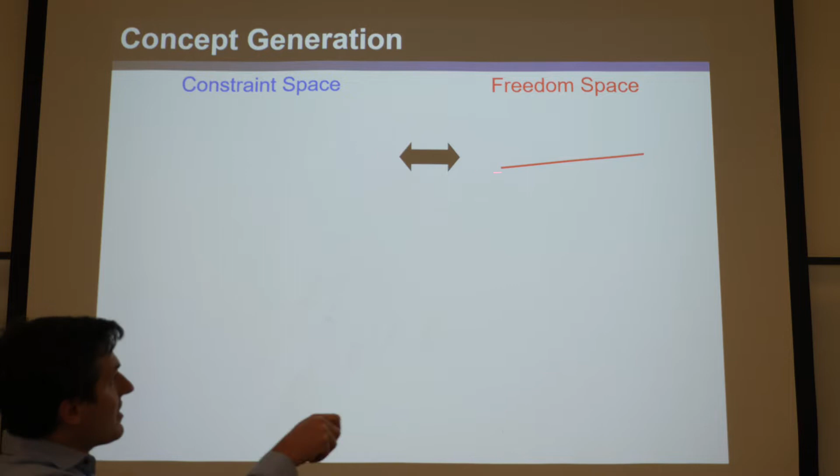Okay, so we'll pick up right where we left off. So let's say we wanted to find the constraint space of this freedom space. This is very common: say you wanted to have a flexure that just rotates, a single rotation axis. That's one of the most common flexures that people want, just give me a flexure that rotates. It's like a revolute joint in rigid mechanism land, right?

Well, say you didn't know the FACT chart and you just wanted to find its constraint space so you could know everything in there, or so you could visualize all the designs. Can you think of a shape that would represent every possible blue line that could intersect that red line? There's obviously a lot, right? Because there's just 1 degree of freedom. So 6 minus 1 is 5. There's 5 non-redundant independent wrenches, pure force wrenches in there, and they're going to make a huge subset of infinity. But can you think of some geometric shapes?

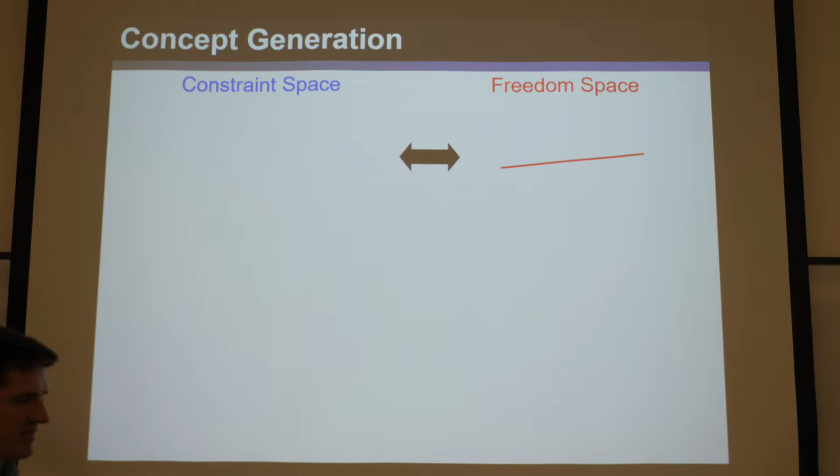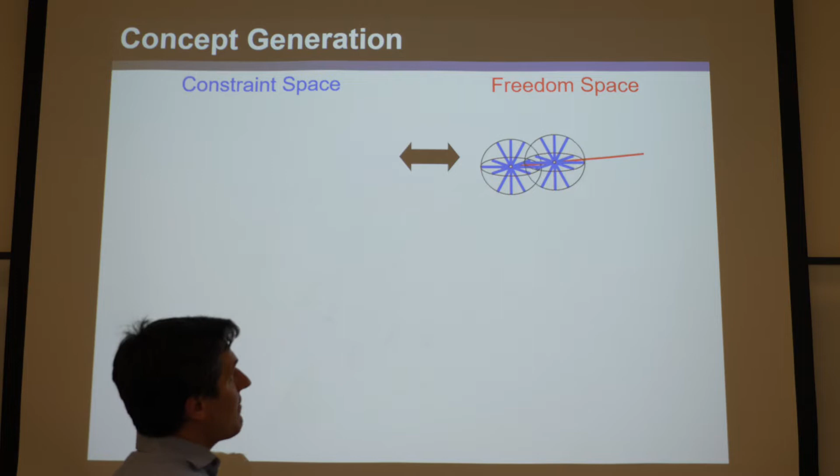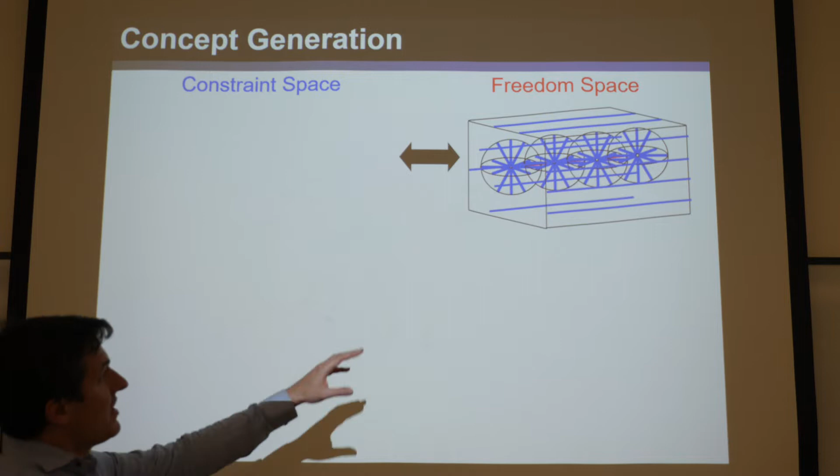Well, in my master's thesis, I thought of it as this sphere: every single blue line in the sphere that intersects that point would be in there, and every sphere marches all the way along there. So you can imagine every single sphere at every single point along the red line would work, and that would capture most of the lines. But then there's all the blue lines in the box that are parallel to the red line. So if you look at my master's thesis, you'll see I draw this constraint space like that.

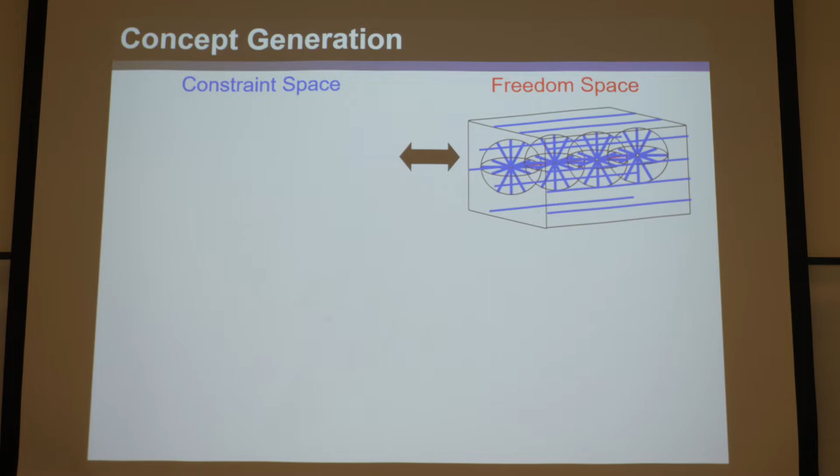But it wasn't until my PhD thesis I realized there's a much more elegant way you can represent all those lines. Those are all the blue lines, conceptually; that's the correct way to visualize them. But a more elegant way to package it is just a bunch of intersecting fully blue highlighted planes. If you take every plane that intersects that red line and fill it in with all blue lines, then that will contain all the lines from the last example. So this is how I started representing it and how it's in the final FACT chart. It's a cool realization that every single design lies within there.

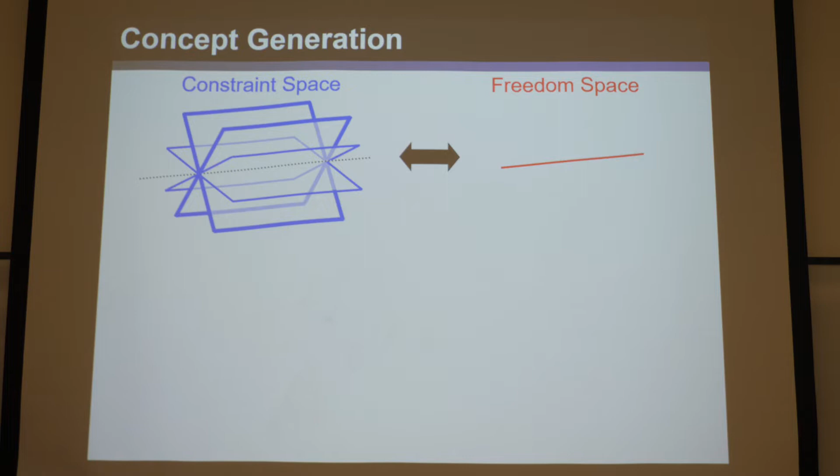So there's a number of papers out there where people publish, hey, I found a new rotational joint. This is a very famous one. This is a cross pivot flexure where the blades lie on these intersecting planes, which is why it only achieves a rotation. Now, by the way, cross pivot flexures are amazing. They maintain their stiffness over a huge range. They have very high load capacity and do an amazing job. So it's a brilliant flexure, and this deserves its own paper, to be honest.

But there's a lot of papers where people keep designing things that look totally different. This is, by the way, how you could assemble it. But for instance, this looks totally different. This thing also achieves a rotation. It's grounded in these two back ends. The reason it only gets that rotation is because its blades lie on these intersecting planes.

Oh, gosh, I really need to take a break here.

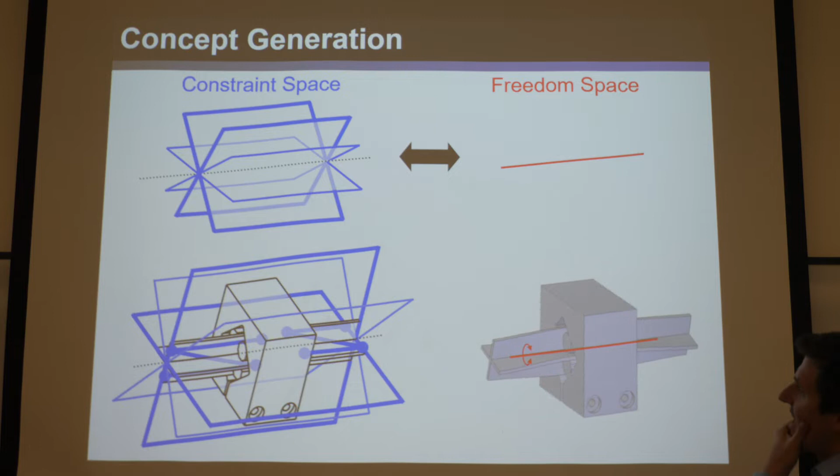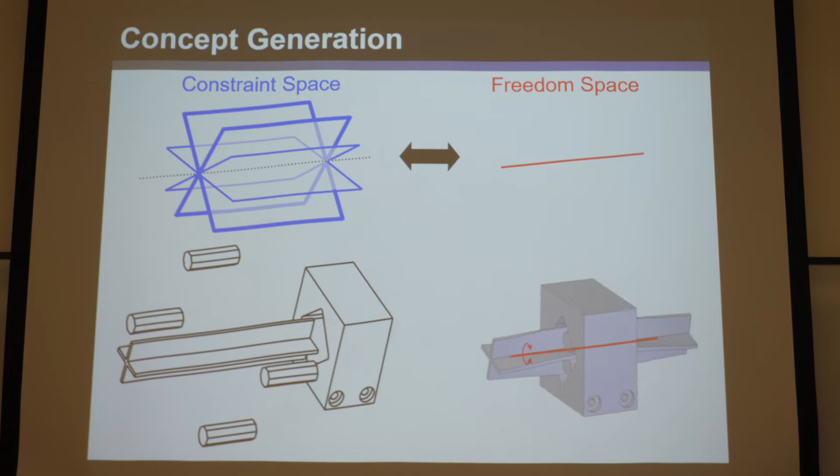But anyway, that's why it achieves that rotation. And it looks completely different. Here's how you could make it: you put some bolts in there to clamp it. That would be one way to do it. And then here's another totally different looking example where it's got 4 blades connecting these two bodies that also lie on these intersecting planes. They get a rotation as well.

It's just the first instantaneous motion that's permitted. It's the direction of compliance. So before this ever deforms, it actually is a pure rotation. Then as it rotates through other infinitesimal increments, it actually screws in, whereas the other ones don't. Although with this one, the axis of rotation actually drifts as it moves with a certain parasitic error.

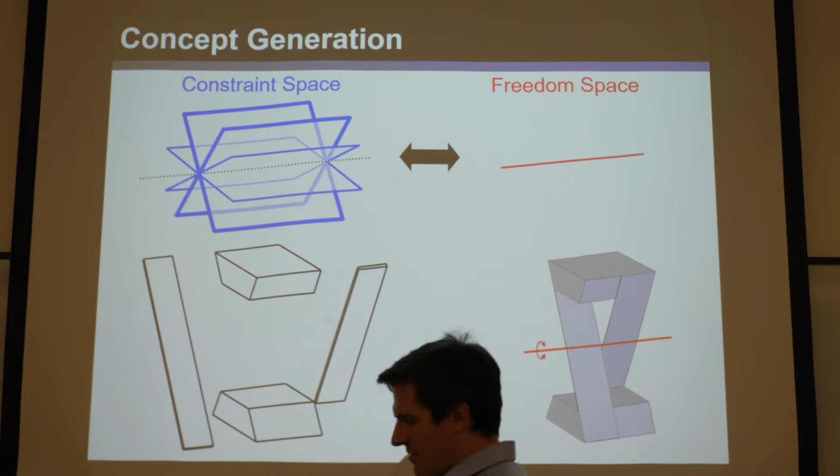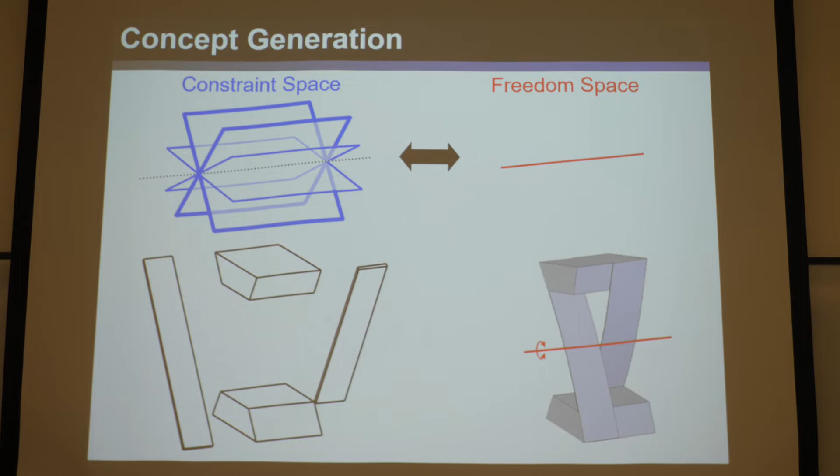But anyway, FACT doesn't consider that. FACT doesn't care about that. That's a higher level analysis. It finds, before it even deforms, what the instantaneous initial direction of highest compliance is, or axis of rotation. Okay, and so they all have the same initial instantaneous rotation, and the reason is because all their flexures lie on these planes.

And so what I was saying is a lot of designers will just keep publishing papers, and it seems like they're very creative and they have these really neat new designs that look very different than these three, and they keep coming with these rotational flexure joints. But once you know the secret that all designs lie in these intersecting planes, all these new designs stop looking very novel and creative, because they just all lie on those planes.

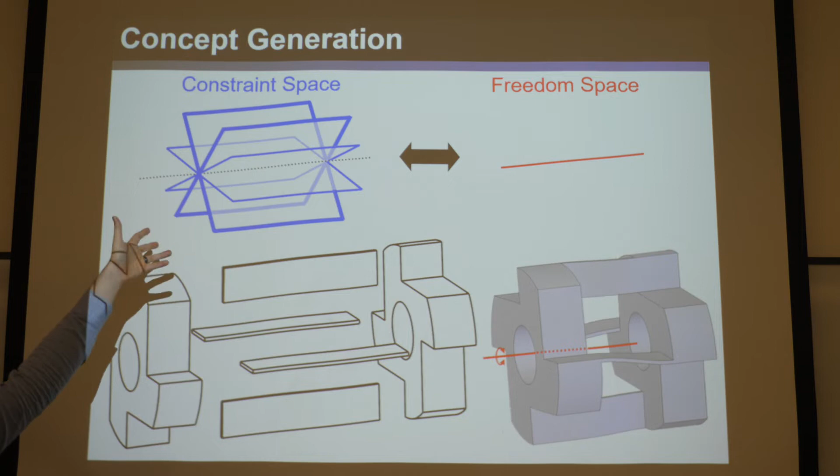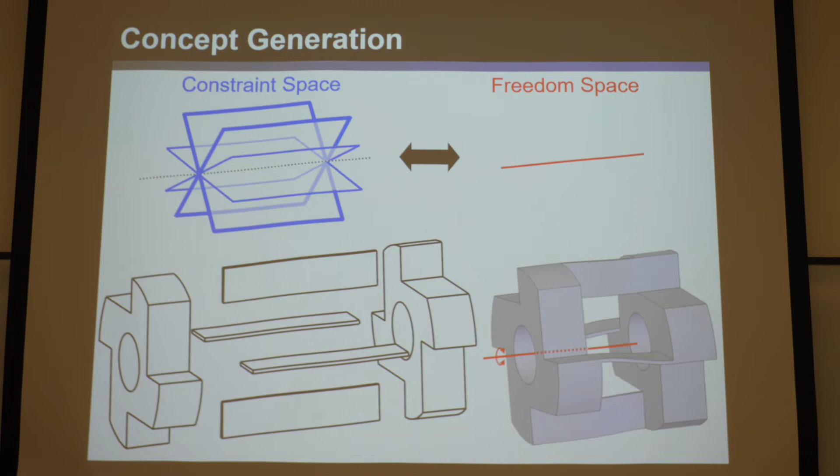So if you have this knowledge, you have this huge advantage, because you can already visualize every design. Every design anyone throws you is trivial, because you know they lie in these intersecting blue planes, and as long as you have 5 independent constraints in there, then it'll achieve this rotation. Okay. All right, so that's kind of the power of FACT.

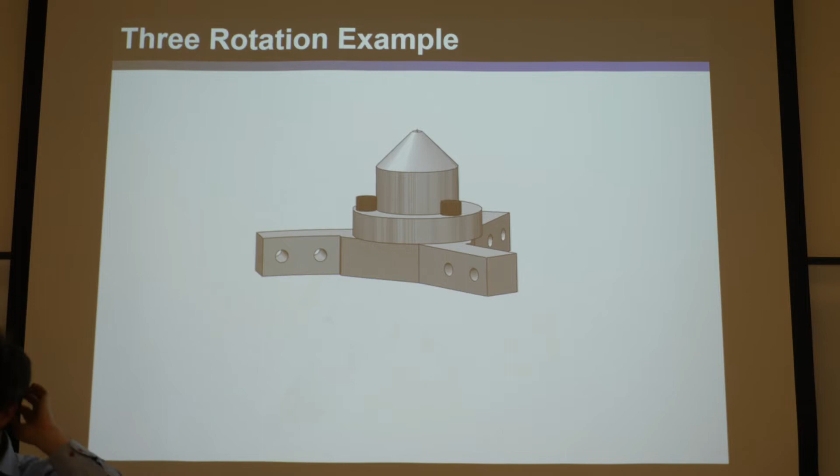So I'm going to show you now from start to finish how the FACT design approach works, and really all you need to know. Okay, so here's a simple version of FACT here. Say I had this example where I've got this stage, and it's got this little probe tip up here, and I want to constrain it to some ground with a parallel flexure system, so that it achieves 3 orthogonal intersecting rotational degrees of freedom.

Okay, so which is basically a spherical joint, right? If you got a ball in a cup, for rigid mechanisms, you get 3 intersecting rotations. So let's make a compliant version of a spherical joint. Okay, so how do you do this? The first step of the FACT design approach is specify what degrees of freedom you want. And that's honestly the hardest step, knowing what degrees of freedom you want for any given application. A lot of designers don't even know.

What you need to ask when a customer comes to you and you're designing a flexure is, well, what degrees of freedom do you need to be compliant? And then what directions need to be constrained, and then what directions you don't care if they're constrained or if they have degrees of freedom. That's really how you want to package it, right? Because sometimes they know they want certain degrees of freedom, but then they don't care about others. If it's a degree of freedom, no problem, if it's constrained, no problem. But these directions absolutely need to be constrained.

And when they sort out degrees of freedom in those 3 categories of degrees of constraint, degrees of freedom, and things that don't matter, that's how you want to think about it, and help them realize what absolutely needs to be a degree of freedom and what absolutely needs to be constrained. And then the other things can give you more sets of possible degrees of freedom that you can pursue with different designs to get what they want. But in this case, say they know for sure they want these 3 to be compliant and everything else to be absolutely constrained.

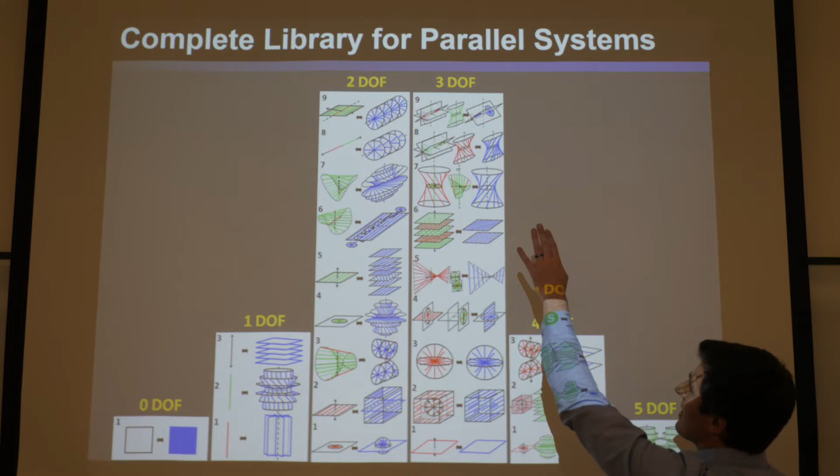For instance, those 3 intersecting rotations may be in this one, right? This one has 5 degrees of freedom, and it's just a bunch of intersecting red planes. You could pick 3 intersecting rotations in there, but it's got way too many other things going on. There's 5 independent things where they just gave you 3. So don't bother looking in any of these other columns. Look in the 3DOF column, and it's got to contain it. There's no other shape in here that contains all 3 intersecting rotations except this one.

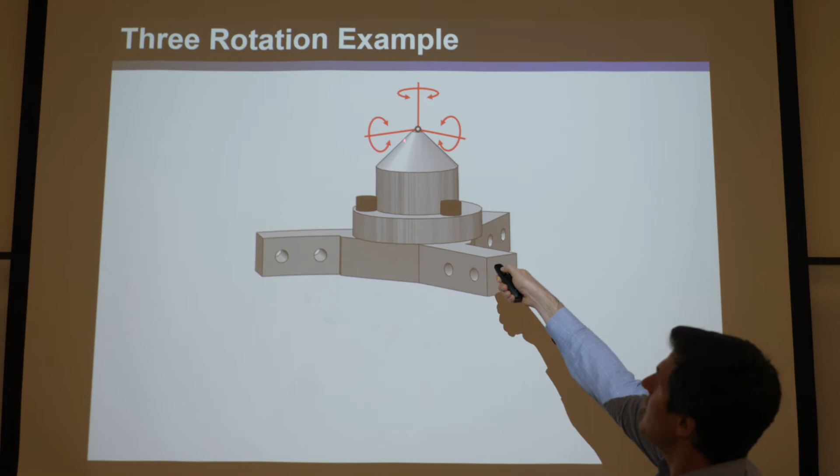So hopefully you can see the 3 orthogonal intersecting rotations are in that one. But you could already know that, right: these 2 will make a disk. Those 2, if you add together, will make a disk. And those 2 will make a disk. So you start adding all these things from disks, and you start generating a sphere. So that's the sphere of rotations.

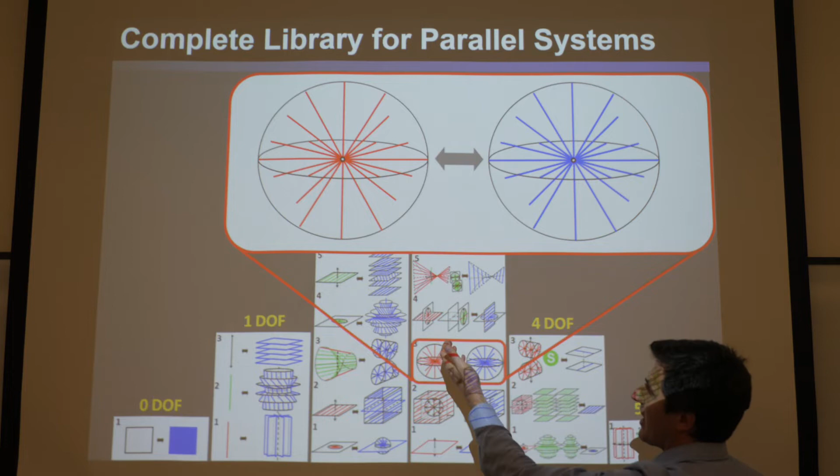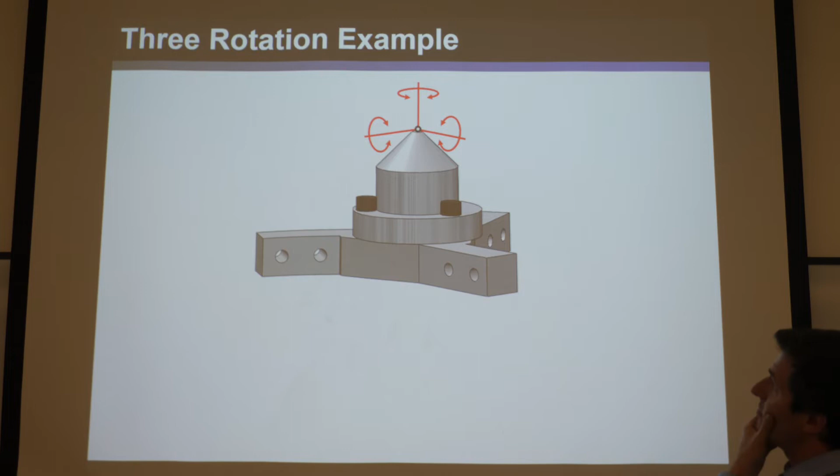So the first thing you tell your customer is, they said, I want those 3 degrees of freedom, I want everything else to be constrained. Well, you can say, if you want those 3 degrees of freedom, you have to get all these as well. They may not realize they also have to get the combinations. So say, are you okay getting every rotation that intersects that point? And if they say no, then say sorry, because you live in reality here, and you can't just get those 3 and not get their combinations.

So say, here's what you have to get, but that's the fewest permissible motions that contain the ones you want, with as few extra ones, and everything else will be constrained. So they say, okay, fine. If you tell me that's how reality works, then that's how reality works. So then you say, well, your design space is this. That's it. If you want a parallel system where you connect this stage directly to a ground, your design is going to come from there.

Then how many? Say they want it to be exactly constrained. Well, how many wires do they need to pick then? If you go back here, you always just take that column number, say 6 minus the number of degrees of freedom, and it will tell you how many non-redundant things there are in there. So 6 minus 3 is 3. So you know you have to pick 3. And so that's the design space. You just have to pick 3.

Now what you could do is pick sub-constraint spaces. You could look in my master's thesis, and you'd find there's just one sub-constraint space. And you'd be disappointed what it says, because hopefully by now you would know what the sub-constraint space would say, because this is a very simple one. So my point is you could either look up in my master's thesis the sub-constraint spaces, or you can deduce them yourself. And I guarantee with a few more hours of practice, you'll be able to deduce them all yourself.

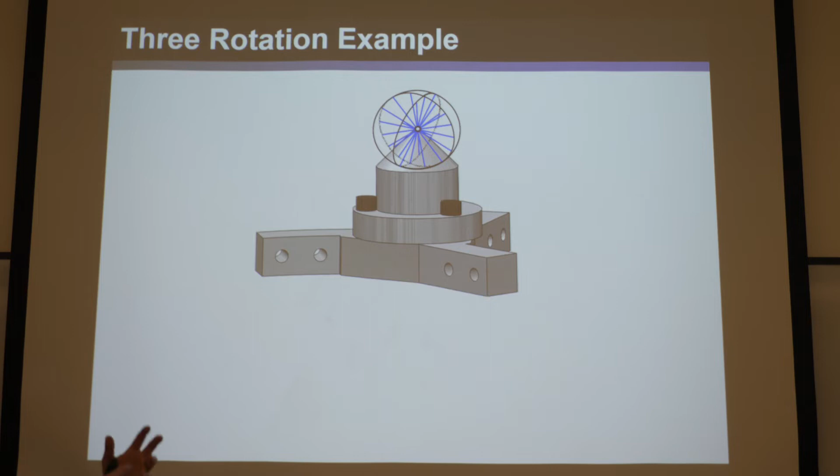What would happen if they all lied in the same plane? Well, then they'd be a disk, and a disk only contains 2. Okay? So as long as you don't pick your 3 so it makes a disk, you're good. Okay. So a couple other rules of thumb.

Once you know how many to pick, once you've picked your sub-constraint space, in this case we only had one option, and once you know how to pick them, it's generally wise to select your constraints as far away from each other as is possible, right? So constraints are kind of like electrons. They like to be as far away from each other as possible. They repel each other. And the reason is because if you separate them, they'll resist moments better, and they'll just be more solid designs, and they'll exhibit their freedom spaces more clearly.

Or it's like people on a bus. When you get on a bus, everyone sits as far away from each other as possible, so it's not socially awkward. And only when the whole bus is full, the seats are full, people start sitting next to each other. So it's like people on a bus or electrons, they repel as far away from each other as possible.

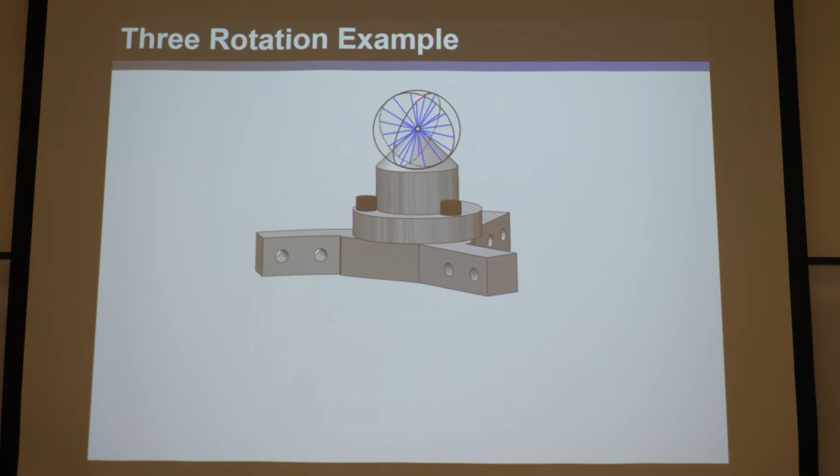So the furthest you could pick 3 things from this sphere apart would be 90 degrees in kind of a tripod. Now, if you're unable to do 90 degrees, any other angle would be fine. But it would be nice to make it symmetric, to have them the same angle apart. This is where the common sense of the designer comes into play. So you pick these 3 all with the same angle apart. Again, the most stable is 90 degrees, but if it takes up too much space, do less, it's fine.

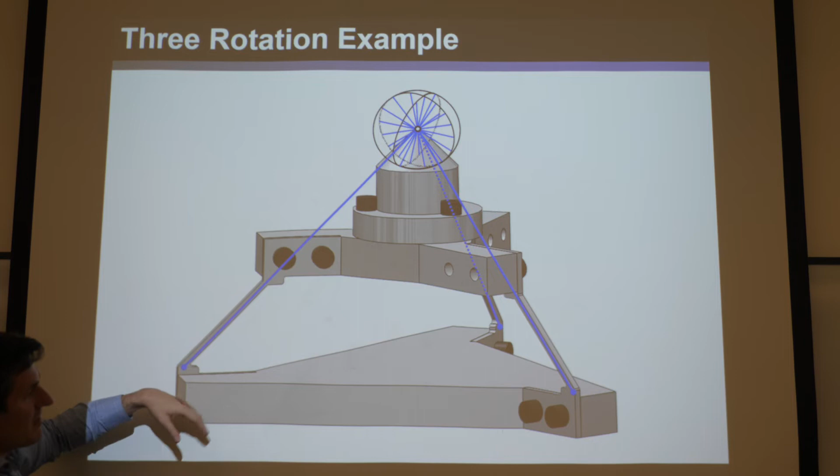And then just make sure you pick your wires so that they connect the 2 stages. Connect that stage to that stage, and connect that stage to that stage, and you see where the wires are drawn. Then you have to use your common sense to know how to fabricate them. You can see we made these with different Z-shaped or weird-shaped parts that could be bolted onto the face of this ground and this stage. And remember, we added this lip here, so it moved the strain down.

So anyway, the cool thing is FACT at every step. First of all, it doesn't have many steps, it's very simple, and it shows you all possible designs. But it allows input from the designer the whole way for every step of the process. And sure enough, if you do it, you get your degrees of freedom. And here's the mode shape.

So again, the steps of FACT are: pick the degrees of freedom you want. Be very careful in your selection. Look at the FACT chart. Look in the column that corresponds with it. Find the freedom space that contains those. Look at its constraint space. Determine how many things you can pick in that constraint space to be exactly constrained. Then look up or deduce its sub-constraint spaces and pick those so they're non-redundant.

And if you wanted to over-constrain this for whatever reason, say you didn't want to have things be axisymmetric. By the way, axisymmetric is always awesome. If you can spread things 120 degrees, it's always magic in nature. But say you wanted 4 wires, you were stuck with some square-looking tripod. Then you could pick a 4th one, spread them all the same distance apart, and it would be redundantly constrained. Or maybe you wanted to redundantly constrain it just to stiffen it or increase its load capacity without changing its degrees of freedom. So maybe it wouldn't be such a bad idea.

But anyway, you can see how this works. And the approach is great because you can visualize every possible design, you can consider all the possible designs with all the different sub-constraint spaces. And again, my master's thesis has the sub-constraint spaces for every single one of the 26 constraint spaces in the chart.

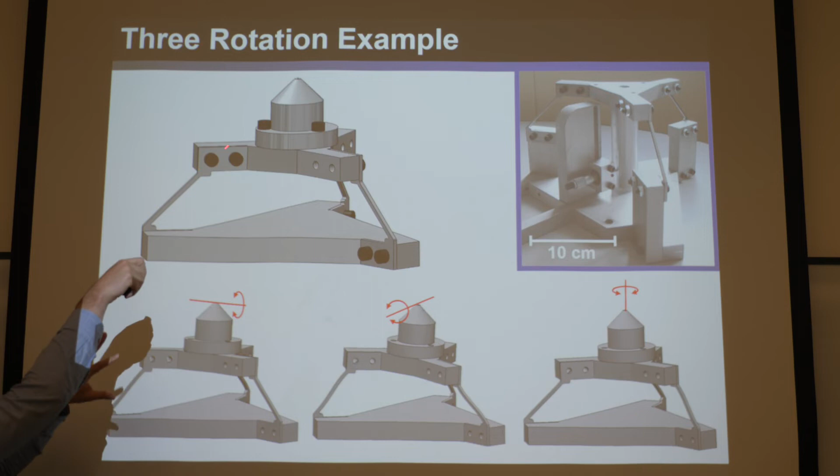And you can infuse your common sense at every step of the process, knowing how it needs to be fabricated, knowing these precision principles, knowing you need to lower the strain at the joint, knowing how you're going to assemble it, knowing things should be as symmetric as possible, and knowing whether it should be exactly constrained.

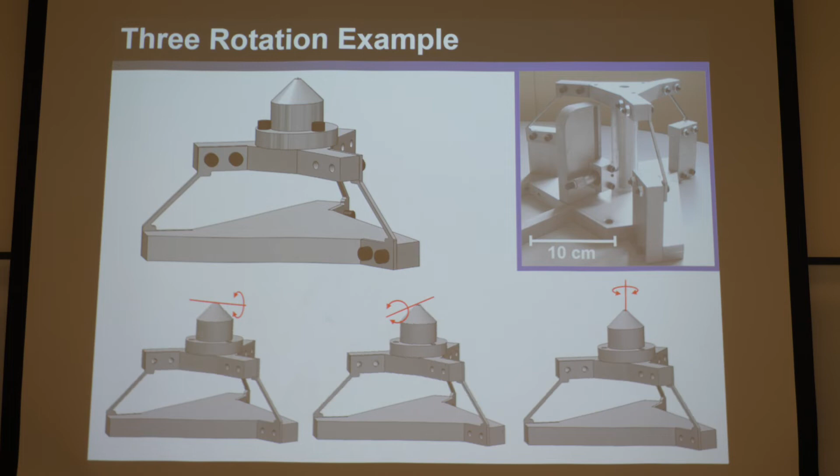So you can make beautiful looking things that really look like true machines that aren't all organic and strange, and make them follow all the principles of precision. So that's really some of the power and advantages of the FACT approach. Okay, so let's do one more example, and then that should wrap all this up.

Say you wanted to design an array of micromirrors. Turns out if you have micromirror arrays, you can do all sorts of crazy things with light. Imagine a checkerboard of thousands of little square mirrors packed side by side, and say you wanted these mirrors to tip and tilt independently. You can have actuators below them, or wherever you need, to tip and tilt these guys independently.

Well, then if they're small enough, a millimeter or smaller each, and you can very quickly control them and rock them back and forth very rapidly, then you can basically make a mirror that can take any light that bounces off of it and redirect it in any way. And there's all sorts of neat applications I can tell you about at the end of the lecture.

But say someone came to you and said, I want to design this micromirror array that gets tip and tilt, and it's got all these constraints. My range has to be plus minus 10 degrees. The speed has to be 4 kilohertz. The settling time has to be 0.2 milliseconds. Again, a lot of this stuff FACT is not going to do. FACT is going to get the degrees of freedom, and then you get to tune its geometry and material properties and pick its actuators.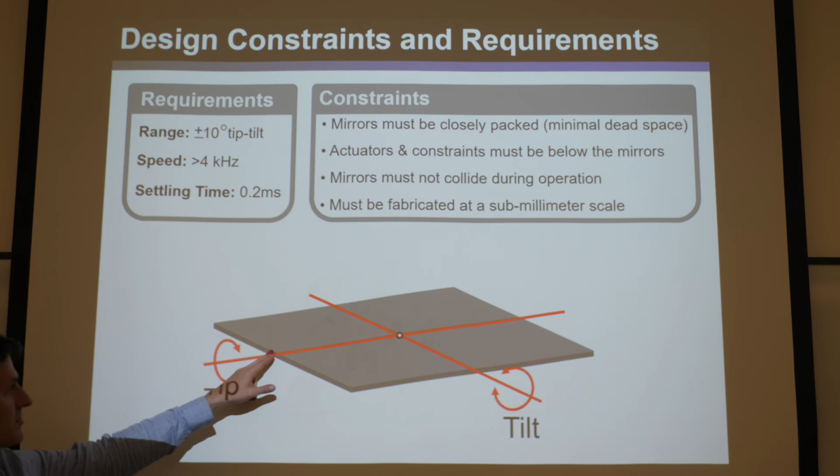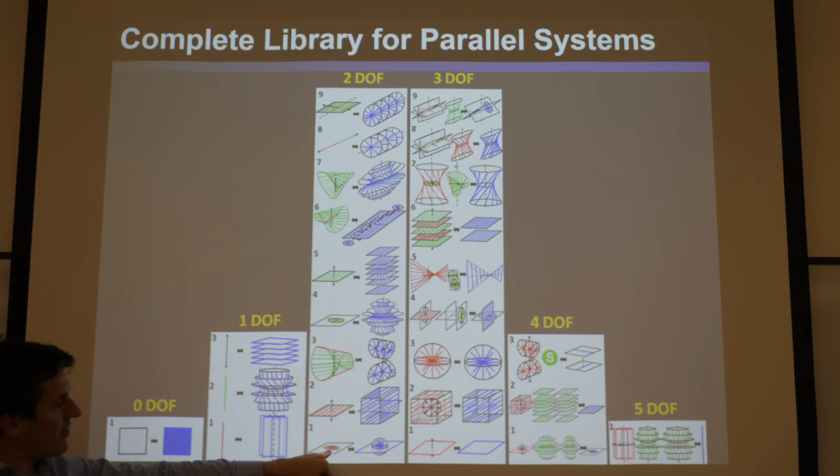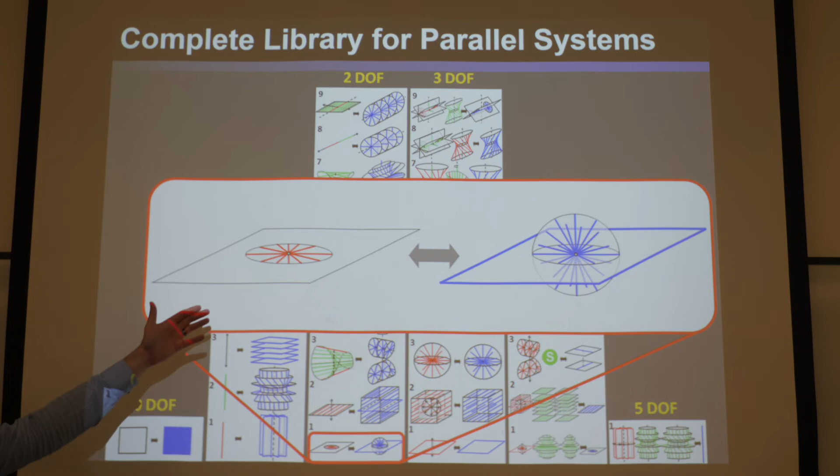But anyway, you should know that if there's 2 intersecting red lines, they get a disk of red lines. Okay? And even if you didn't know that, you could look through and very quickly find that 2DOF type 1 is the freedom space that contains the 2 intersecting rotations. So the constraint space is this, okay? There's 2 DOFs in here, so how many non-redundant constraints do you pick in here to be exactly constrained?

And by the way, you might ask yourself at this point, do you want this to be exactly constrained? Well, it would be really nice because we're controlling light reflecting off mirrors, so you care about precision. So if you are going to over-constrain it, it better be something that isn't assembled and is as little over-constrained as possible. You definitely want to use the full deformation of these flexures to steer the light. Flexures are by far the best bearing option to steer light for this application, right?

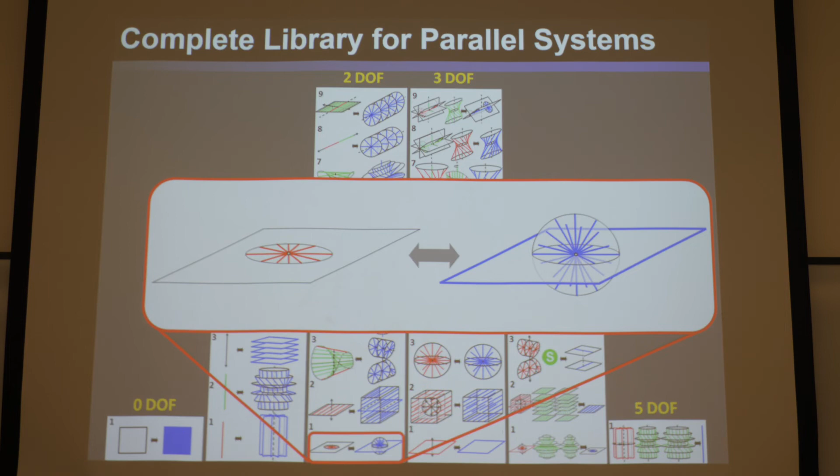So, okay, the wire flexures, or the constraints, will lie within here, and you know that there's going to be 4 you need to pick because 6 minus 2 is 4. And by the way, you just learned from the last example how many things are contained within a sphere. Going back to here, there's 3 things in a sphere, right? So they contain the 3 degrees of freedom, and the constraints contain the 3 non-redundant constraints. So spheres always contain 3.

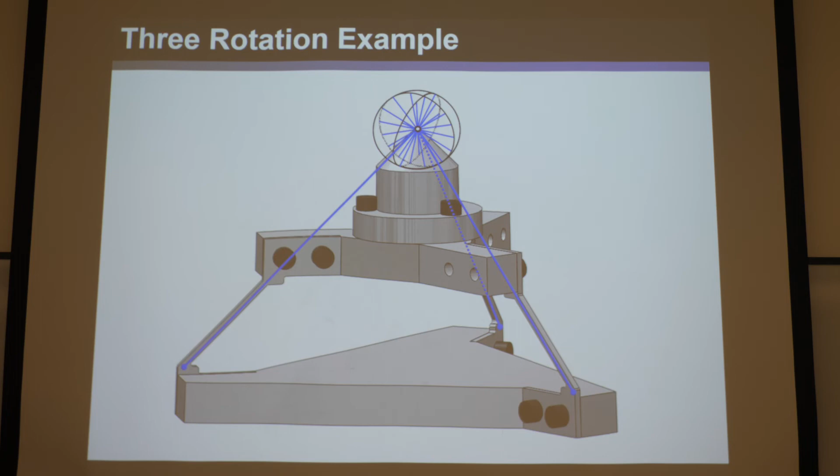That's another thing to memorize. Discs contain 2. Spheres contain 3. Planes with parallel lines contain 2. Filled-in planes contain 3. Boxes contain 3. And I think that's what you have memorized so far. Okay. So great. So there's 3 in this. You have to pick 4 in total, and there's 3 in this plane, and there's 3 in the sphere. That saturates those, that's how much they contain independently. But together, they contain 4, because 6 minus 2 is 4.

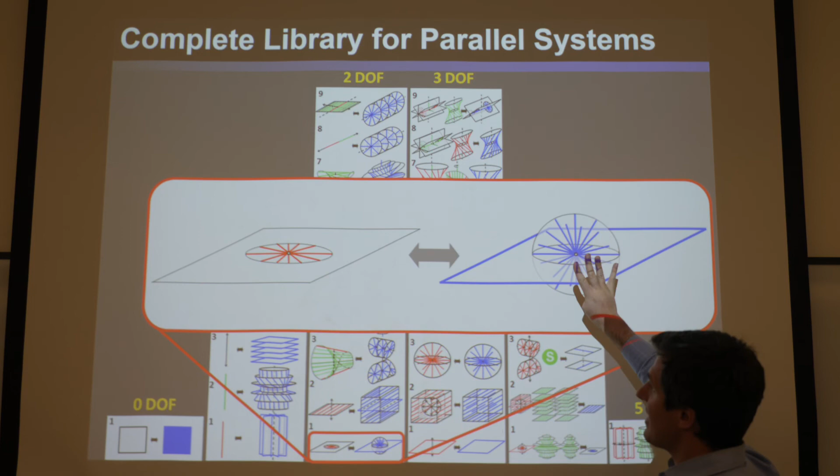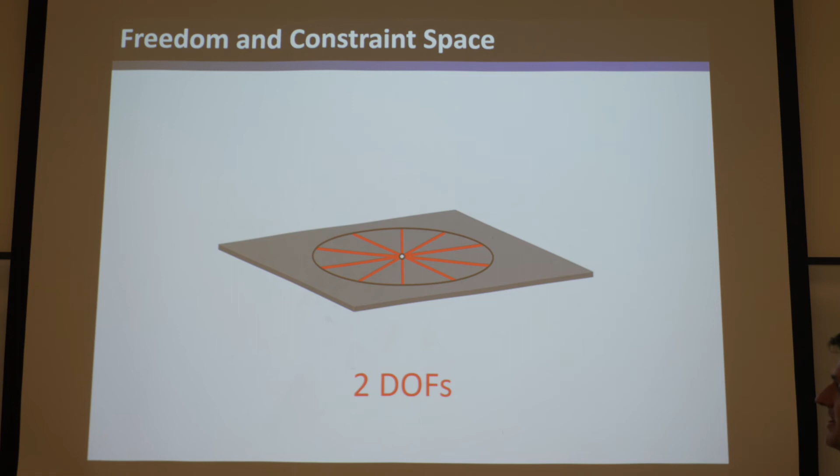So you go back to the guy that hired you who says, "I want these 2 things." Well, you've got to also have everything in this disk, which they would want, right? They'd be stupid to just want tip and tilt. They should want rotations about everything in the disk to steer the light in any direction, right? So they'd be thrilled with that. And then you can say, okay, here's your constraint space, and you've got to pick 4 things.

Now, what you could do is look up in my master's thesis the sub-constraint spaces for this constraint space, and there's only 4. There's rarely more than 5 for these. That's the good news. This one has 4, and you could probably deduce them right now. So I'll show you what they are, because if you've internalized what I've lectured on, you could already start coming up with your own sub-constraint spaces.

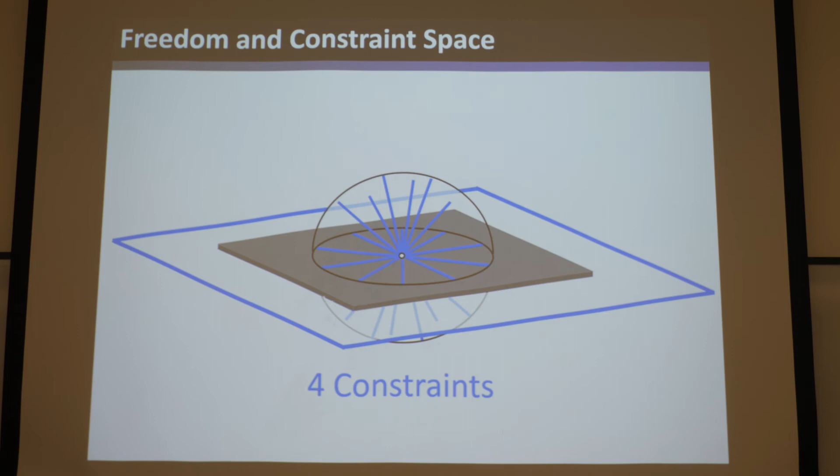So the first sub-constraint space says pick 3 from the sphere that don't all lie in the same plane, because it would be a disk, and then 1 from the plane that doesn't intersect this point here of the sphere, or it would be part of the sphere. Because remember, a sphere only contains 3, and a plane only contains 3. It saturates after 3 for both of them. So you should be able to deduce this now. I haven't written the words here, but if you look at my master's thesis, that's what it says.

3 from the sphere that don't lie in the same plane, and 1 from the plane that doesn't intersect the sphere. Okay, then the other thing you can do is you can pick 2 that intersect from the plane, and 2 that intersect from the sphere, that of course would form a plane. Basically a disk and a plane, and you've got to make sure this angle isn't 0 or 180 degrees, because then it would be on the plane. It would be like picking all 4 from the plane, which can only hold 3.

And then you want these 2, if they're going to intersect, the distance from this intersection point of these 2 planes to be non-zero. Because if they're 0, well, first of all, if these 2 points coincide, then it's 4 from the sphere, and that's no good. But even if they don't coincide, if this is 0, it's those interlocking disks, which you already know is a different freedom space. So it's those little tricks. But anyway, if you pick 2 from the sphere and 2 from the plane that intersect, this is not 0, and these aren't 0 or 180 degrees, you're good.

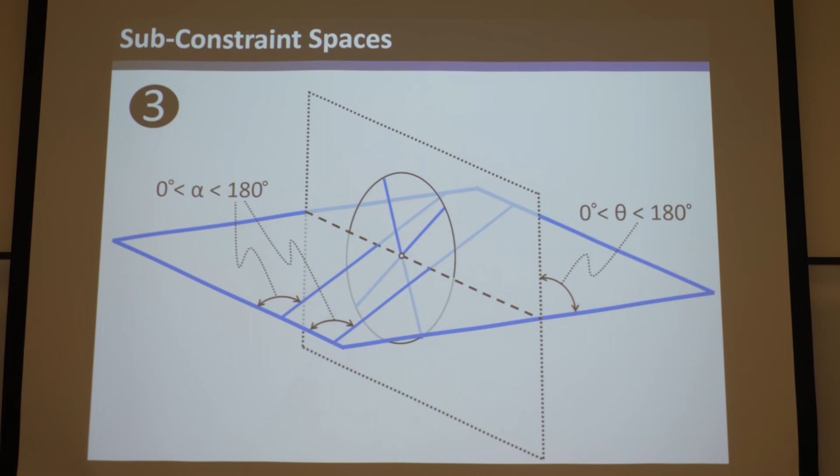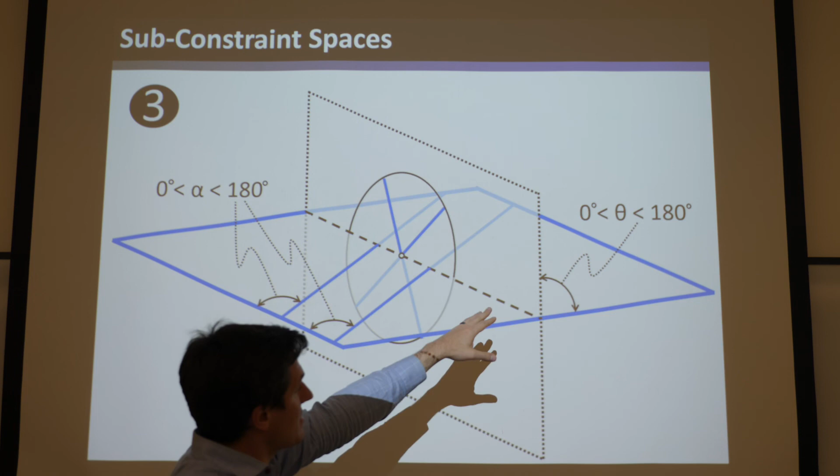Then the other thing you could do is pick 2 from the plane that are parallel and have angles here that aren't 0 or 180 degrees. And in this case, it would be a different freedom space. That's another thing you probably don't know yet, but you will. But trust me, these angles can't be 0 or 180 degrees. And then this of course can't be 0 or 180 degrees. And that would work.

And now the final thing is pick 3 from the plane that don't all intersect at the same point. That includes a disk and parallel lines that intersect at infinity. And then 1 from the sphere that doesn't lie on the plane. Those are the 4 sub-constraint spaces, and therefore the 4 ways you can pick your 4, in this case, non-redundant constraints, so that they're independent.

Now remember, the number of constraints you're picking has nothing to do with the number of sub-constraint spaces. The last example had 5 sub-constraint spaces, but there were only 4 non-redundant constraints. This one had 4 non-redundant constraints, but just happened to have 4 sub-constraint spaces. So we have 4 options here, and we're going to visualize and consider every possible way you can make a parallel system mirror that's exactly constrained.

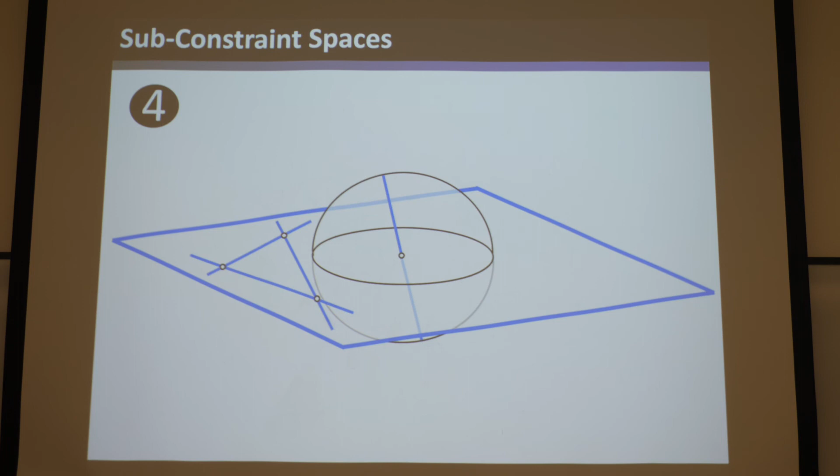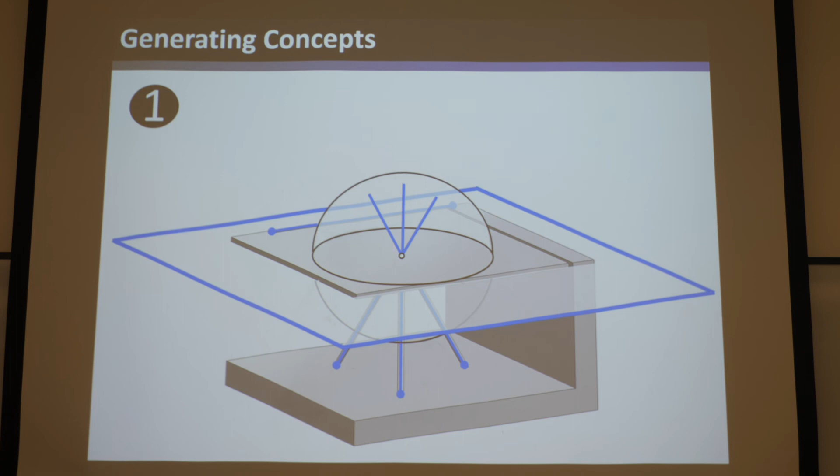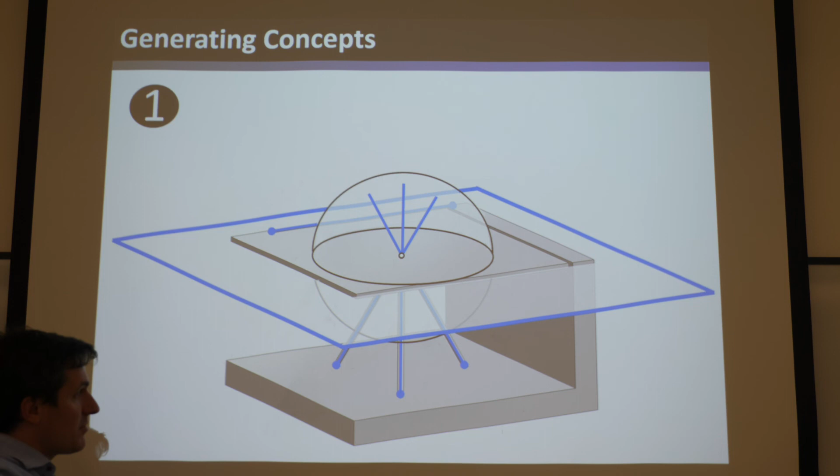So let's look at the first sub-constraint space. Remember, we want 3 things from the sphere that don't all lie in the same plane, and 1 from the plane. Now you use your common sense to say, maybe this would be the best way to make that single mirror. But remember, they've got to be arrayed together. So here's the mirror. If we want tip tilt on the surface of the mirror, we're going to need a wire on the side, tucked close so we have space. And then we need 3, spread out as much as possible in a tripod. That would be an exactly constrained mirror, and you could pack it in an array.

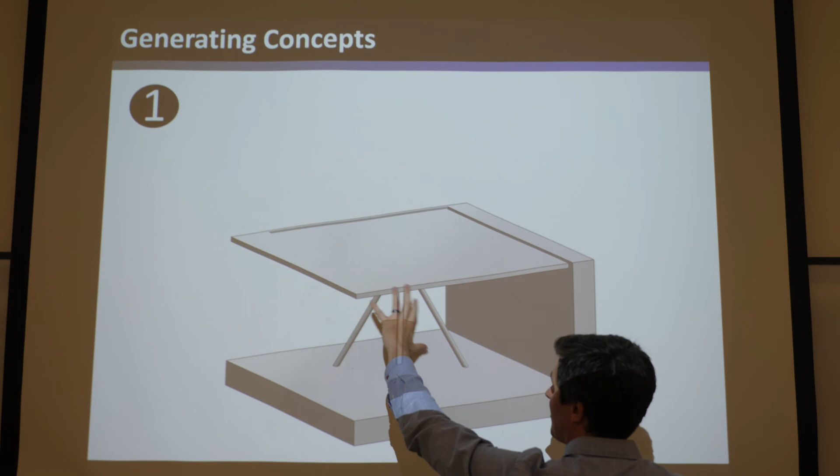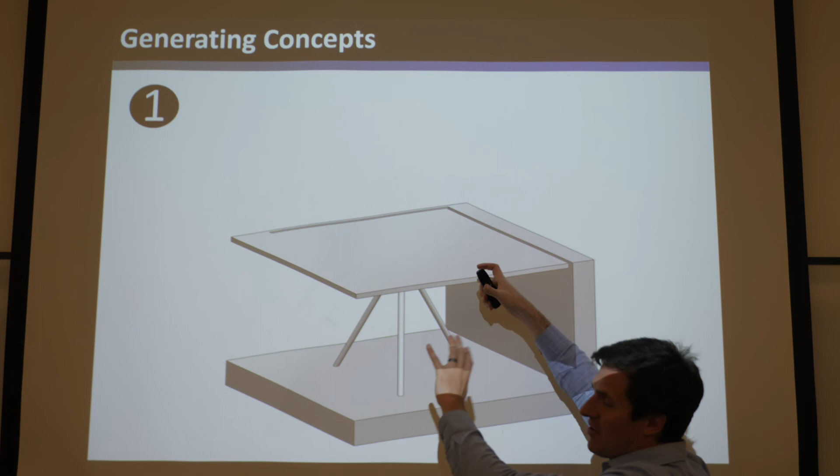But I don't like it. First of all, good luck making this in the microfab, or in the clean room. Angled tripods, wires, that's kind of crazy. And there's not a whole lot of symmetry. It would get tip and tilt, but because there's no symmetry, the axes of rotation would drift over large range, and it'd just be kind of a mess. So I don't like this design. This is probably not a promising sub-constraint space. So try another sub-constraint space.

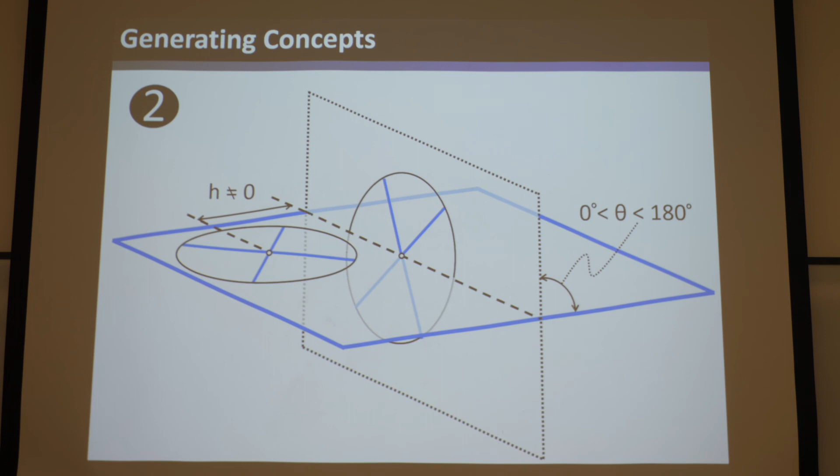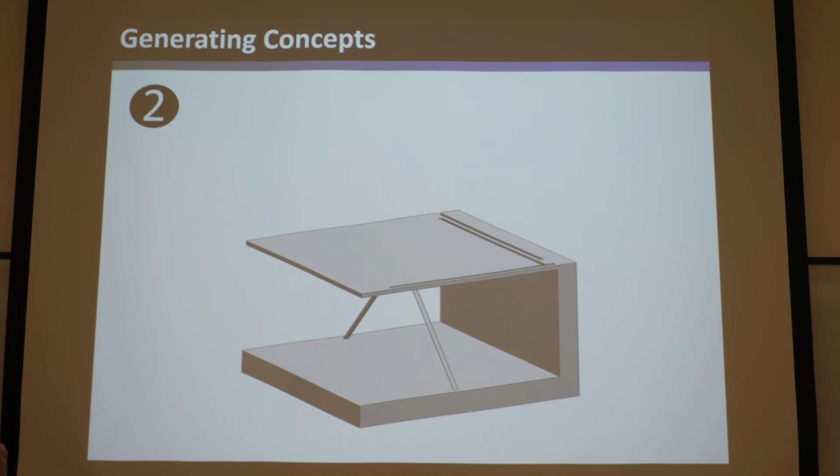Try the second one. Pick 2 from the sphere and 2 from the plane that satisfy these conditions, and there you go. This way you have just 2 angled ones below, and now two things on the side. Again, you could array this potentially, but it would also be